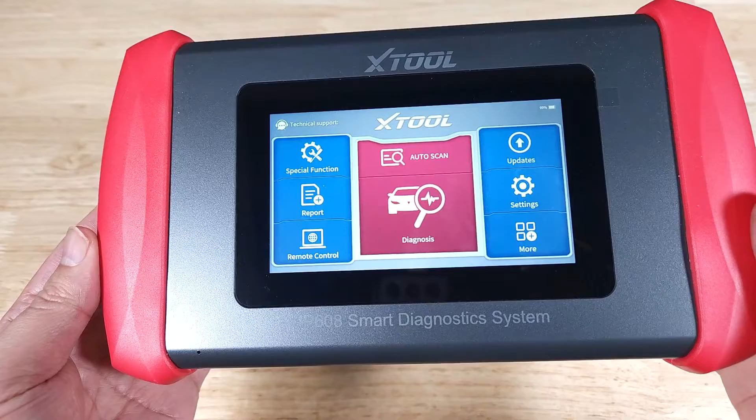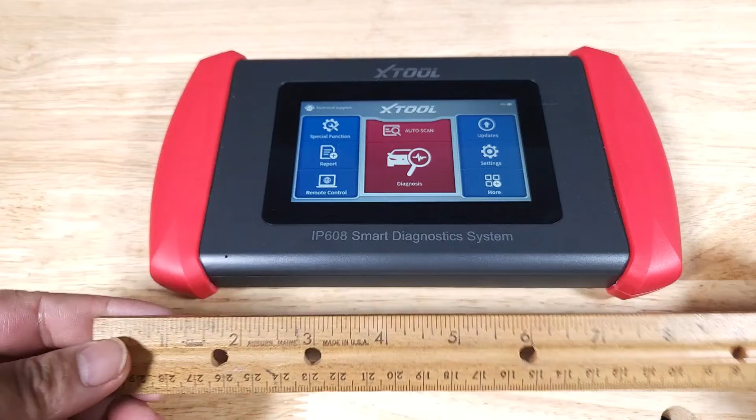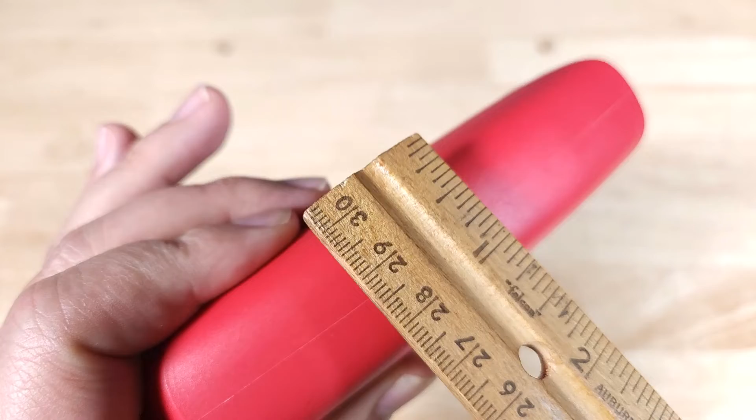Let's begin with a quick size reference. Overall length is just about 9 inches. Going this way, overall length is just about 5.5 inches. And if we put the ruler right on here, you can safely say that's just about maybe 1.25 inches thick.

Let's get the scanner on the scale. Overall weight comes in at right around 1 pound, 5.8 ounces. Just to give you a weight reference, a 16-ounce bottle of water is just about 1 pound, 2.1 ounces. So this is just a little bit heavier than that.

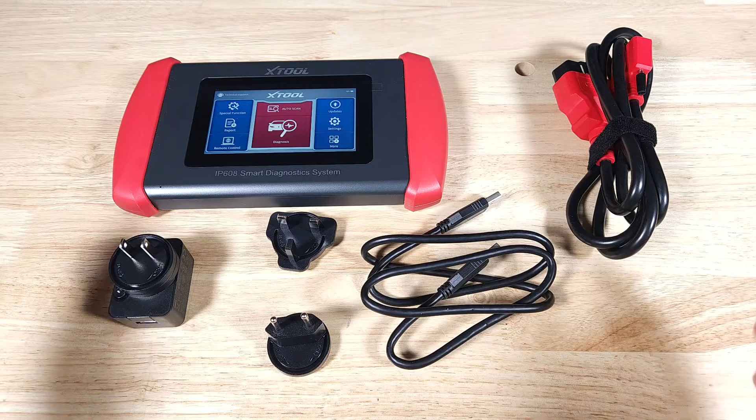Here's everything you get in the box: the scanner itself, and here is your data connection between the scanner and the OBD2. You're going to get a universal charge kit, so this is the block. You've got US, Europe, and Asia plugs, and also a USB to USB data connector that connects into the bottom of your charging block.

There's a few different ways you can keep this battery charged. First, the USB port - whether you're plugged into your laptop or computer transferring data, that's going to charge the battery. Or if you're using this cable to plug into the wall, you can do it that way. Or whenever you have your scanner plugged into your OBD2 into the car, it'll be charging at the same time. And of course, you have your old school DC barrel charger if you have one of those - that's not included in the kit. So most of the time, you're going to be charging either off the OBD2 port or your USB.

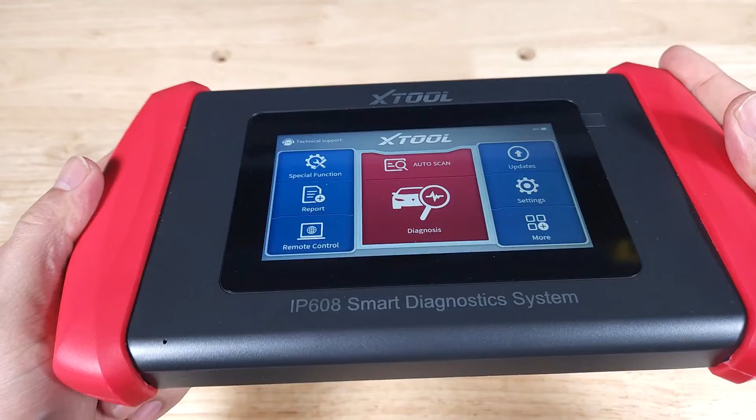It's pretty much an all plastic construction. The handles on the side elevate the scanner, so when you set it down on your windshield or even on your hood, it elevates it from the surface. And if you want to use this 5-foot cable, that should give you enough room to run it from the OBD2 port through your window and down on top of your car hood. So there's plenty of length in this cable.

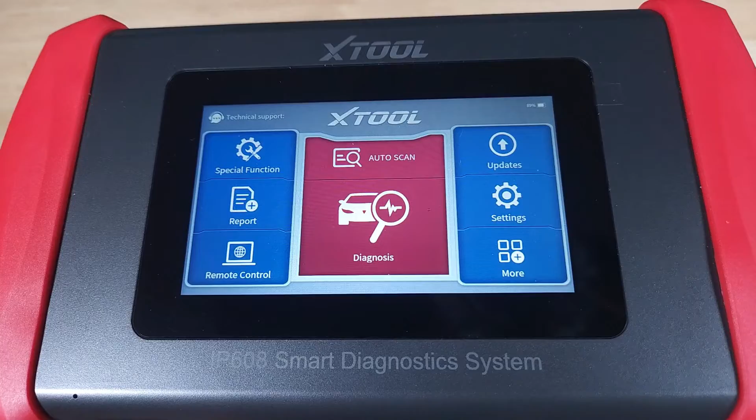This scanner is running Android 10. You've got 2 gigs of RAM and 32 gigs of ROM, plenty of processing power. In fact, you can run 8 different data points on a graph at the same time, and it's got a 5-inch screen. This scanner also has a 3000 milliamp battery, which is such a great convenience - it's such a fantastic feature.

You don't have to stay plugged into a wall or a computer. If you want to sit down or lie down on your bed and view some of your screen recordings and your capture, you can do that without being near an outlet.

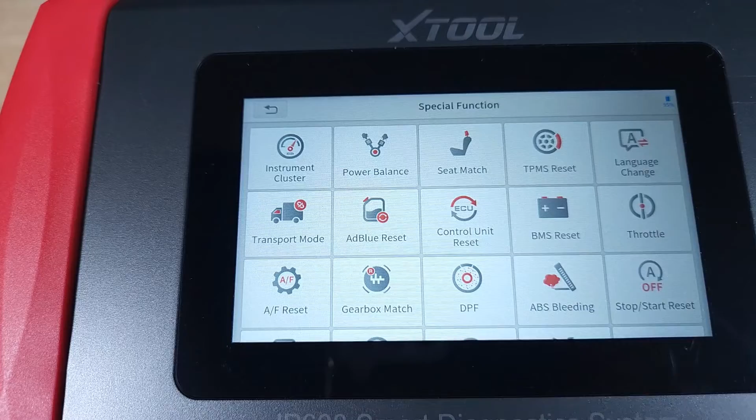Another great thing about Xtool with this specific model is they never charge you for any software updates - they're just going to come for free for life. When you first get your scanner, there's going to be a bunch of updates sitting there. When you're done doing it, you're going to pick up all of these special functions. Now, for me, I'm probably never going to use these because I normally buy older cars. But for those of you out there who buy newer cars, this will let you speak to all of these special modules that normal OBD2 scanners cannot do.

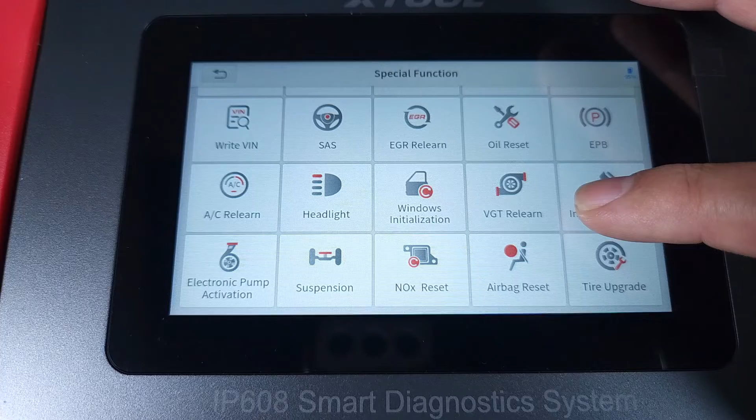Now, using this scanner is extremely easy. It's going to feel very familiar - it's just like operating a smartphone or a tablet. It's Android based, and as mentioned before, it's got so much processing power. The touch experience is exactly like what you're going to find on your phone.

In fact, let me give you a good feel for this. Just think of this as an app that's installed on your tablet. If I swipe up from down and go home, there's your desktop. To get into the app, you just press diagnosis and you're into the app itself. It's that clean, it's that easy, it's icon driven just like any iPad or Android tablet or phone.

And just like on your phone or your tablet, you can do screenshots and screen recordings. Let's have a look at the screenshot here. If you swipe up from down, there is your screenshot right there. Let's try one.

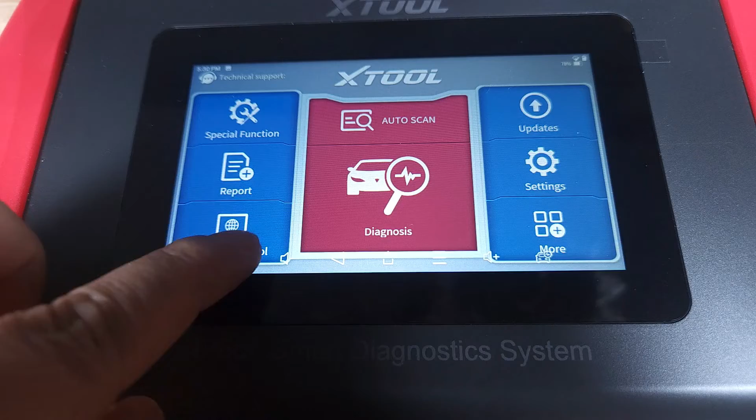Right, there it is. And then when you're ready to view either your screen captures or your recordings, swipe up from down to go to the home screen, go to your gallery, and it's all stored there.

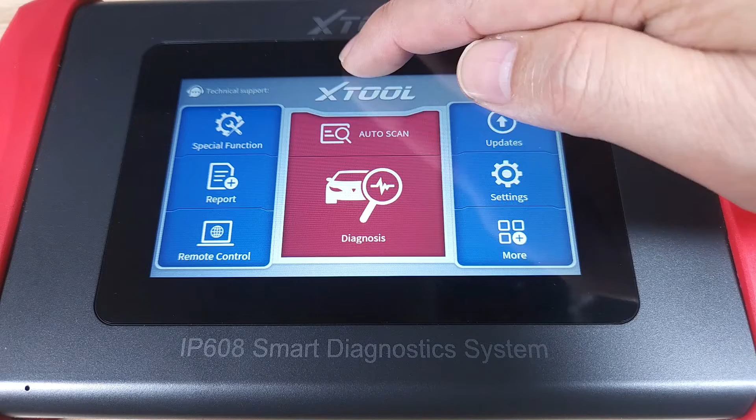Let's have a look at the screen record function. You're going to swipe down once from the middle, once more. Then the menu on the right-hand side, that's where your screen record button is. Let's get that going. You'll see this red dot recording your screen.

This is going to be so useful when we're analyzing short-term and long-term fuel trim on a graph. You can see everything, and it's so useful. Even when we're looking at the O2 sensor voltage, we're going to need to see how that graph responds when we start stepping on the accelerator and raising the RPMs. When you're done, stop, and when you want to view it, swipe up again, go to your home screen, and it'll be sitting here in the gallery.

Next up, we're going to have a look at some live data, but before doing so, just a quick disclaimer. I'm not a professional mechanic, just a simple DIYer, but scanners like these have saved me so much money throughout the years by letting me do my own repairs, especially when I'm going out to buy a new used car. It's really helped me avoid buying some really awful cars. Knowing that, let's have a look at some live data to help you buy some new used cars.

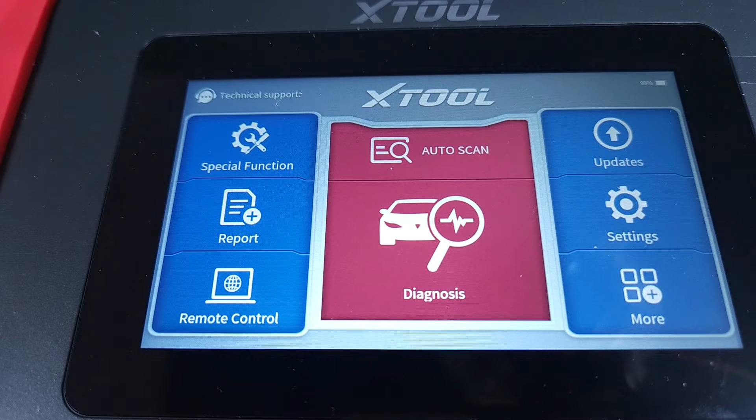All right, let's have a look at IM readiness. This is the first scan you're going to do before you do anything when looking at a new used car. We're in the middle section here with the car and the magnifying glass. Click on that. Next screen, upper left-hand corner, you've got OBD2. Now, these monitors all have to be ready in order for you to continue, because if they're not, that means the computer was reset, either through disconnecting the battery or through a scanner like this. Upper left-hand corner, hit auto scan and let the scanner do its rest.

We are on our way. That reset could be done for a number of different reasons. Maybe they repaired something that needed to be done before selling the car, or maybe they're trying to hide an engine code. In order for those monitors to turn on, it has to go through a complete drive cycle. So it's a good idea to have those monitors ready when you're looking at the car, because every other scan you do won't be accurate unless those monitors are up.

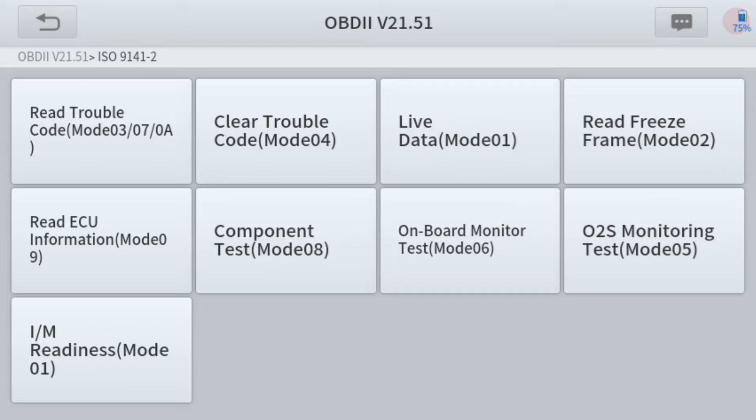Okay, next screen, bottom left, IM readiness. Click on that. Next screen, upper left-hand corner, monitor status since DTC is cleared. Here's what the screen is going to look like. As we've seen before, I have a check engine light, or MIL, on, and all of the available monitors are ready. Now we can proceed to read other types of live data like short-term and long-term fuel trim, and the voltage going through the O2 sensors.

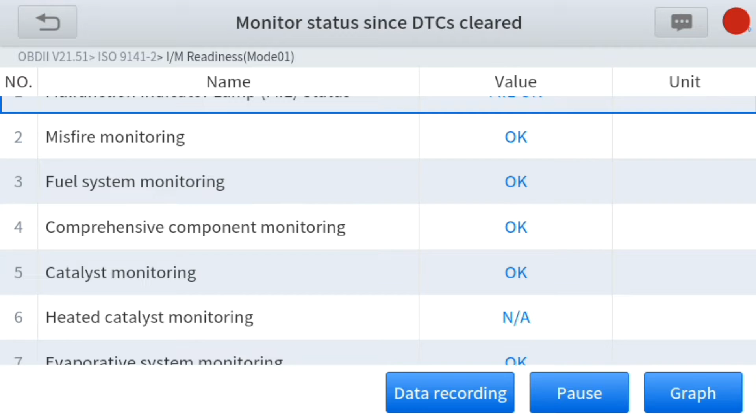Now, it's up to you if you want to continue with the inspection and the drive, but I heavily recommend not going any further until those monitors are on, because you won't know about the health of the engine until you can see live data, which is what we're going to do next.

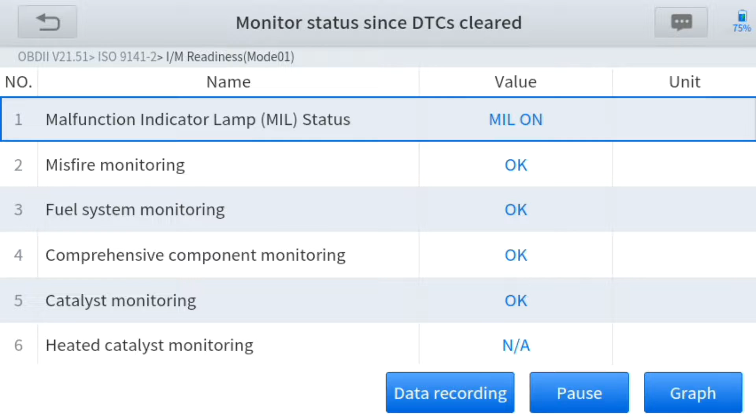Let's have a look. With that out of the way, we can check some live data, and these next few data points are going to be extremely important, because if you're in a state with emissions, or if you're looking for a new used car, this can tell you a lot about the repairs or the health of the engine.

All right, follow along with the yellow circle. It's pretty much going to be the same thing. We're going to read the oxygen sensors first, sensor 1 and 2. This is a 4-cylinder car, so there's only 2. We want to see voltage, and more specifically in sensor 1, going up and down, oscillating. Sensor 2 should be pretty much flat. The reason we want sensor 1 to oscillate is it's reading the pulses from the engine going rich and lean, rich and lean. Sensor 2 should be pretty much flat because the exhaust going through the catalytic converter should be clean, and there shouldn't be any oscillation after that.

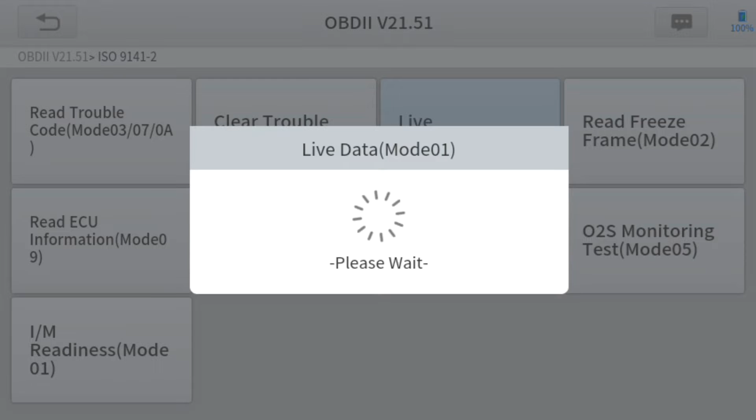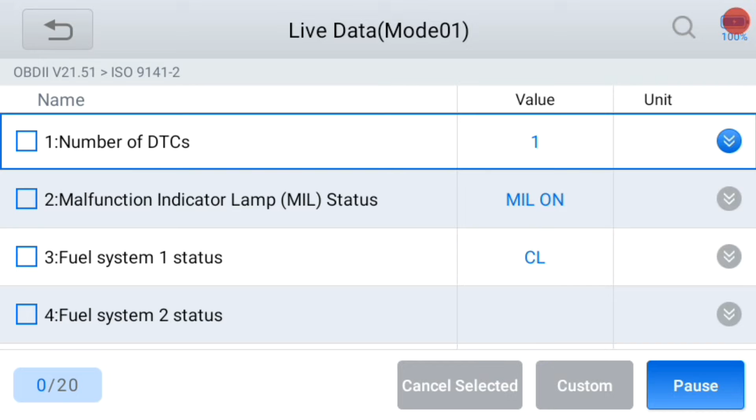So instead of hitting the IM readiness, you're going to click that mode 1 there. Now when you get in here, you want to see CL, meaning closed loop.

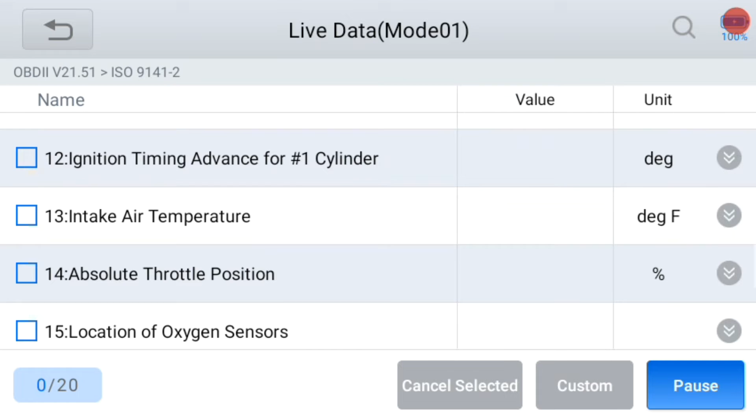That means your oxygen sensors have reached their operating temperature, and now we can read the O2 sensor voltage. And if one of these sensors is bad, I don't know if you guys have ever tried to replace one, but it's hard. Sometimes they're in really weird areas. They need a special wrench.

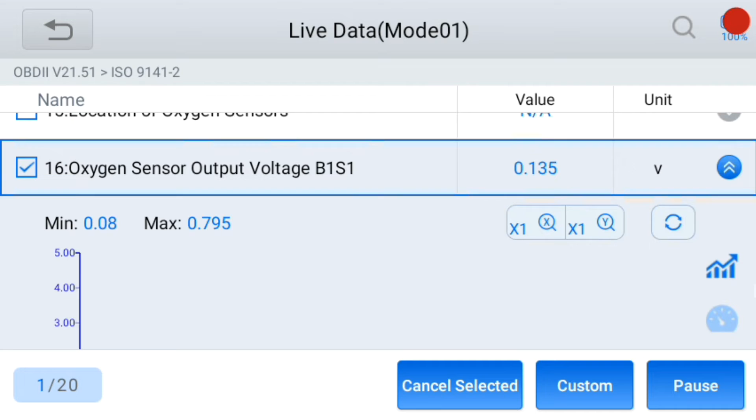They're corroded in there, they break off, all kinds of weird stuff. Okay, here is sensor 1. And if you see this blue dot on the side with an arrow, you can click on that and it'll graph it right here. Scroll up a little bit and we can see nice, okay oscillation, a little bit flat on the bottom. So running kind of lean, but decent oscillation. So O2 sensor 1 is working pretty good.

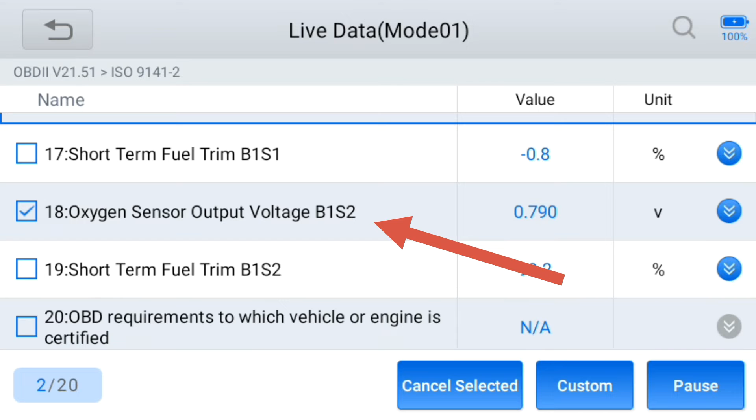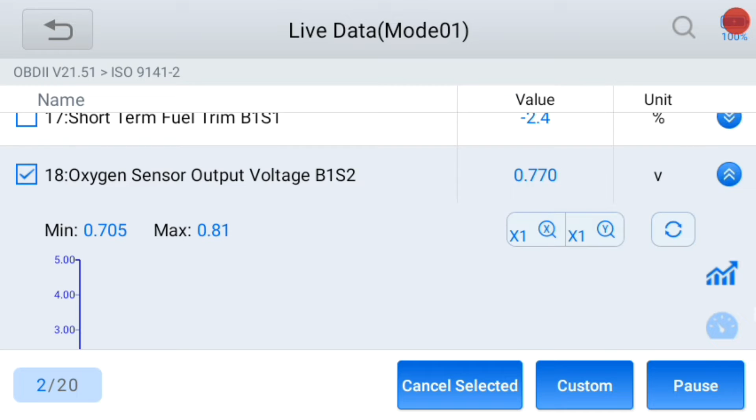Now let's find sensor 2. Should be right under here. Oh, there it is, right here. Okay, same thing, let's have a quick look. And pretty much flat. Okay, this means that the catalytic converter is filtering out what's needed and it's flat. It's not oscillating. Now, if it was oscillating up and down, could be that you got to change your catalytic converter. But so far, we're looking good.

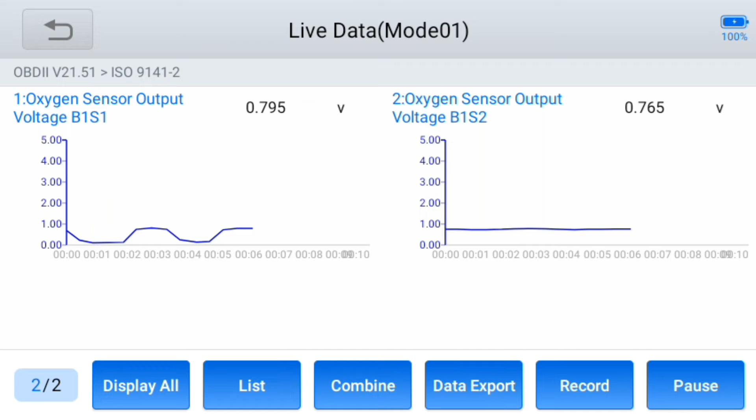Let's hit this custom button. Now, we really can't tell much by looking at the values next to each other, but if we hit this graph button, now we can have a better idea of the relation next to each other. Again, sensor 1 needs to oscillate. If it's flat, that means the oxygen sensor is probably bad. You got to replace that. I'm telling you, you don't want to deal with that mess, especially if you just want to buy a new car.

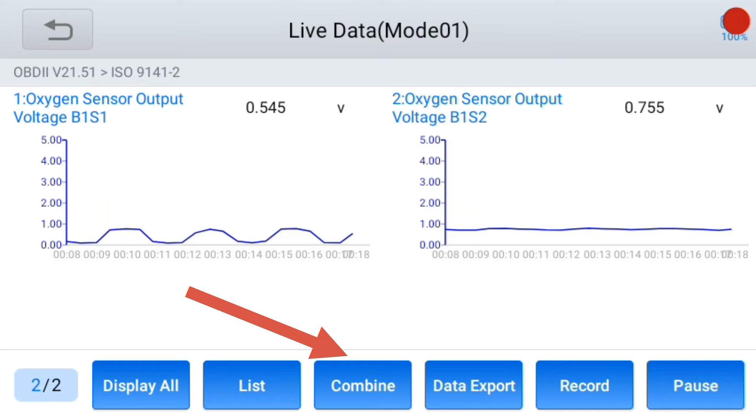And then again, oxygen sensor 2 looks great, going flat, no oscillation. Looks like the catalytic converter is doing its job there. If you click the combine button, you get them together. What it looks like to me is that these are in great shape.

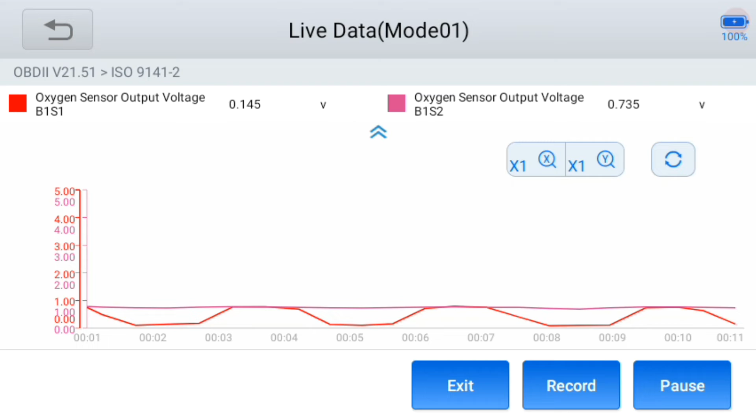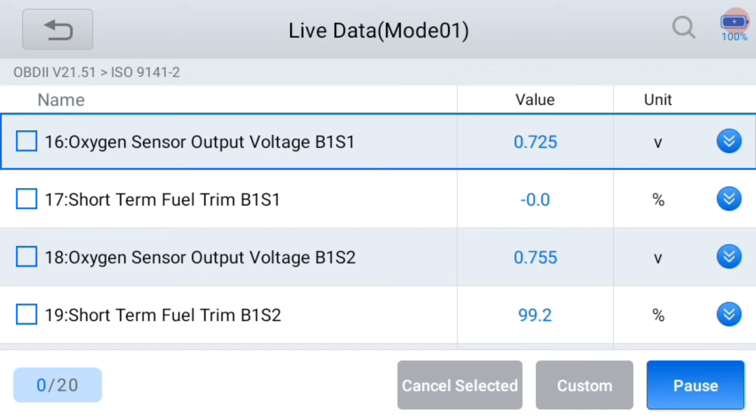Now we can chase down some fuel trim. Back to the home screen, we're going to uncheck the oxygen sensors and find the short and long-term fuel trim. Now I already know from looking at the sensor 1 data stream how it wasn't really smooth, it's kind of flat at the bottom, that I'm running kind of lean.

And you guys saw that I had a check engine light on, and I already know I have 2 leaks from my valve cover gasket. So air is being sucked in through there, adding unmetered air into the engine, and it throws off the air fuel mixture. So the computer's going to want to add in more fuel to make the car run smoothly.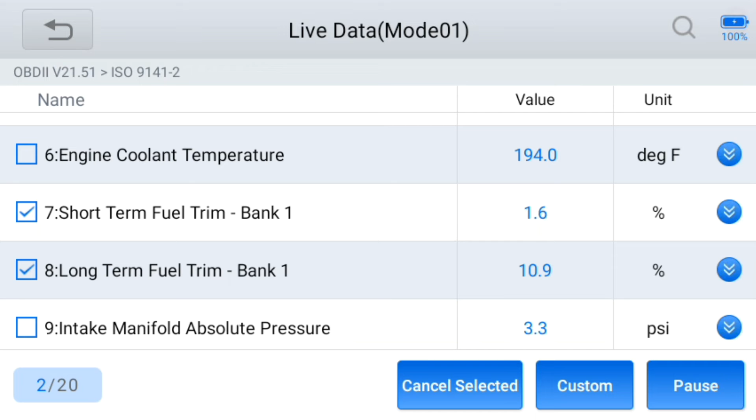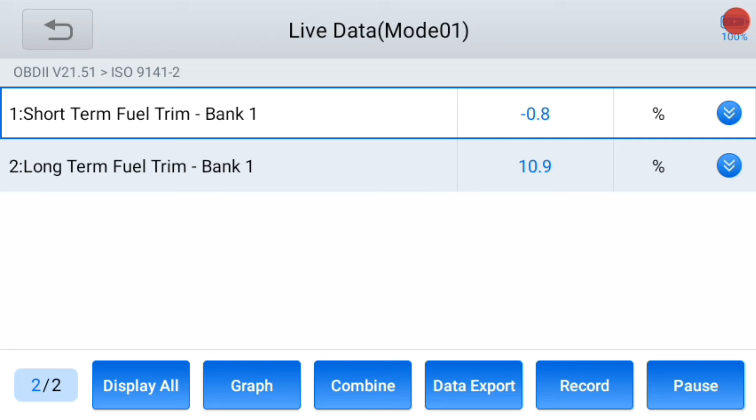Now we're going to do the same thing as we did with the oxygen sensors. We're going to put them on a graph so we can see them side by side. Now, if you're looking for a new used car, what you don't want to see is plus or negative 15 to 20%. There's a whole load of other things that can be wrong with the vehicle if you see that. But here we can see that's probably about plus 1 on the short-term fuel trim.

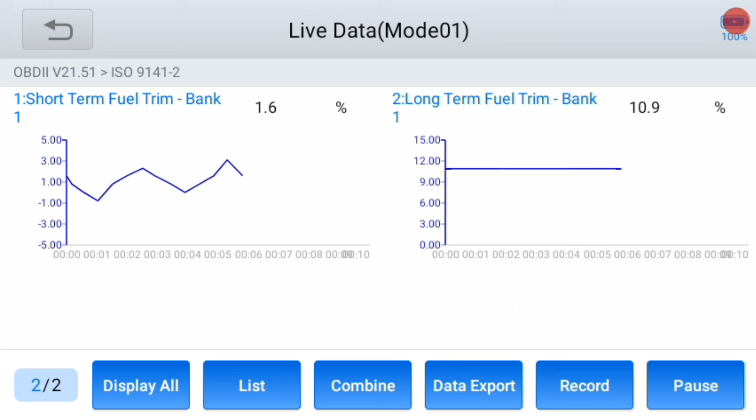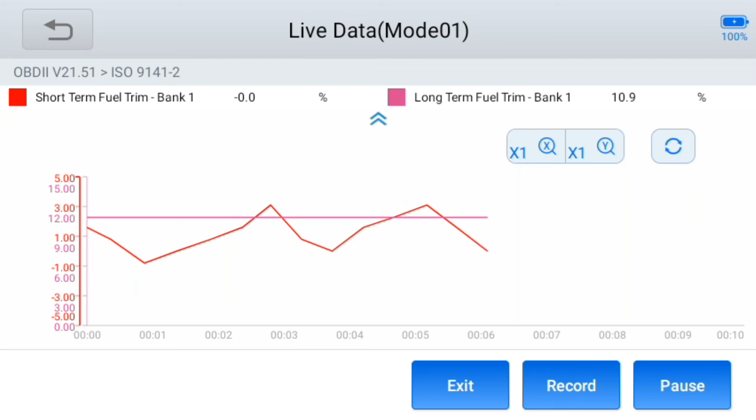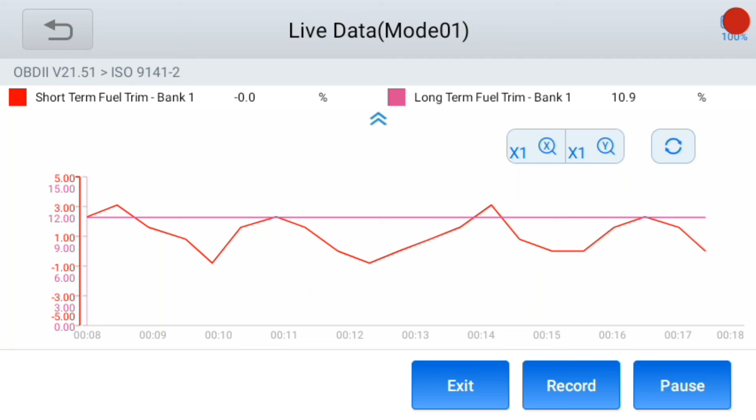Long-term fuel trim, you want to have it at 0. Here it's about 12. So at some time in the past, the computer had to add in 12% to make it run smoothly. But again, with 2 leaks in the valve cover, that's about as good as you can expect. You fix that, the numbers are going to come down and you should be okay. So remember, when you're running this live data, when you're looking at a new used car, try to keep it, I would say, under 10, negative 10, and you should be okay.